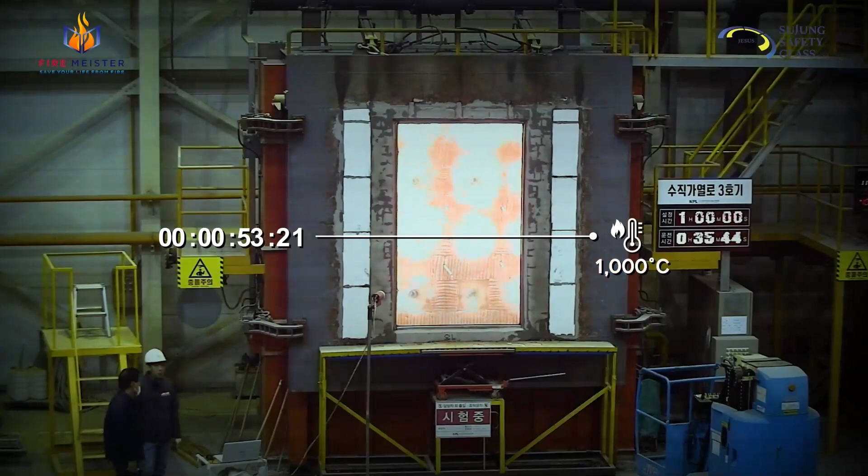The leader of fire-resistant glass that protects our lives from the flames and thick smoke of 1,000 degrees. A company specializing in fire-resistant glass: Sujung Safety Glass Company Limited.

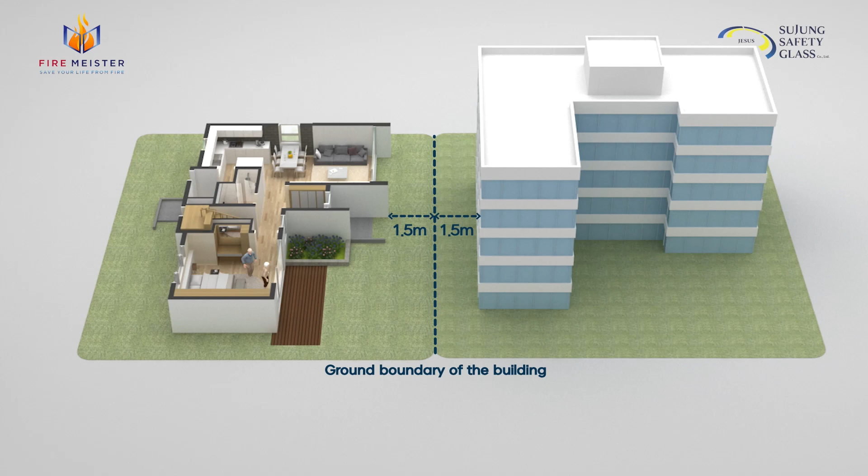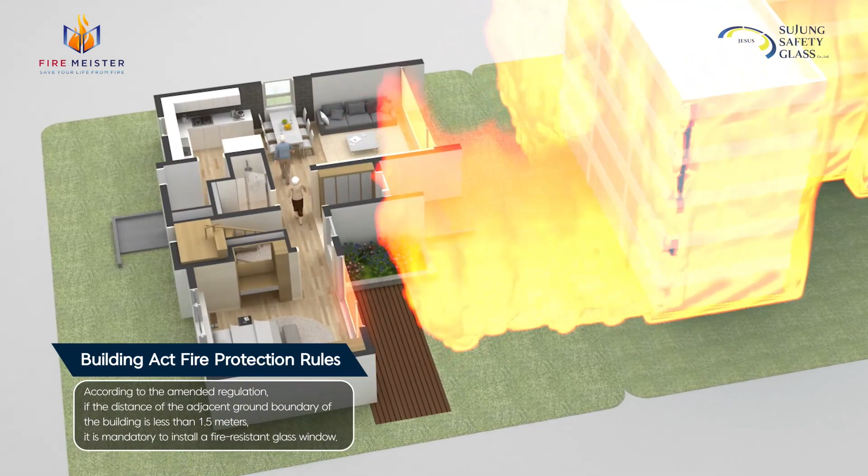In July 2021, the Ministry of Land, Infrastructure and Transport revised the Building Act fire protection rules to mandate the installation of fire-resistant glass windows in some buildings. According to the amended regulation, if the distance of the adjacent ground boundary of the building is less than 1.5 meters, it is mandatory to install a fire-resistant window with a performance for fire integrity of at least 20 minutes.

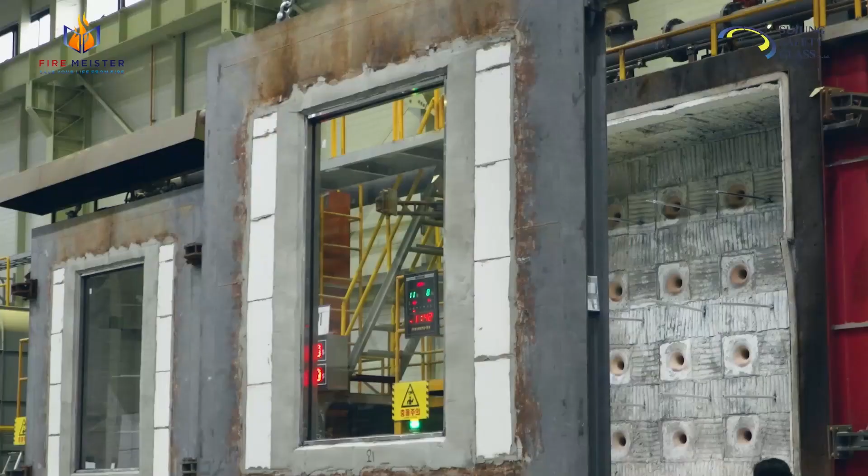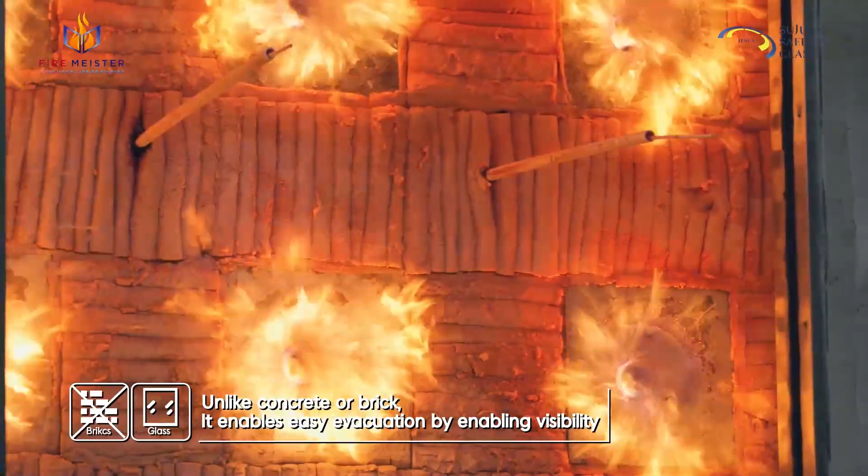In the event of a fire, Sujung Safety Glass's fire-resistant glass blocks fire and, unlike concrete or brick, enables easy evacuation by enabling visibility, as well as withstanding flames for the required evacuation time.

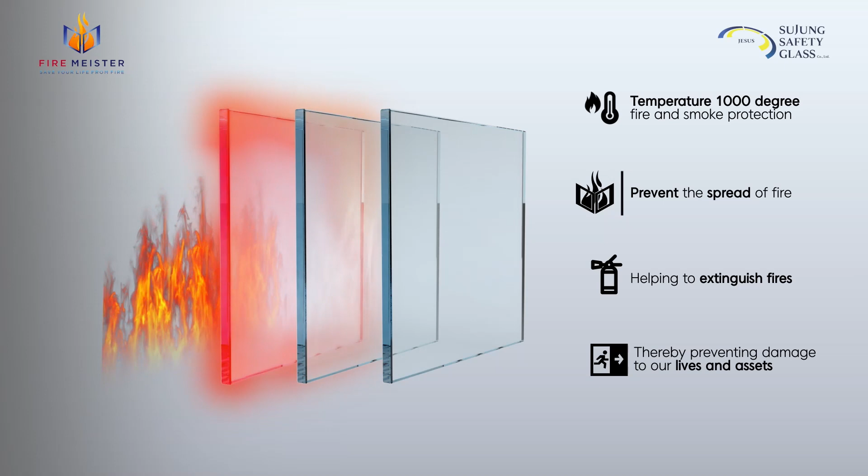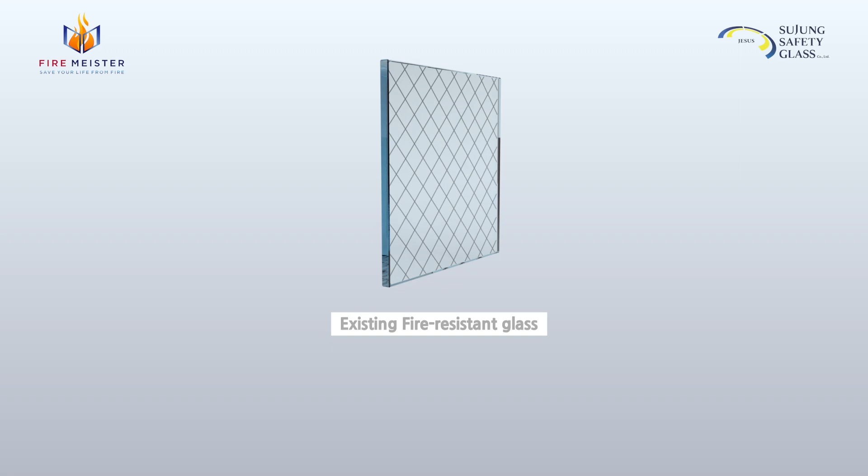Our fire-resistant glass blocks fires and smoke of about 1,000 degrees for a certain period of time to prevent the fire from spreading to adjacent areas, thereby preventing damage to human life and helping to extinguish fires to protect our lives and assets. 6T, 8T, 10T fire-resistant glass is a transparent fireproof glass composed of a single plate without a wire mesh inside the glass and shows fireproof performance for fire integrity of 60 minutes and 90 minutes.

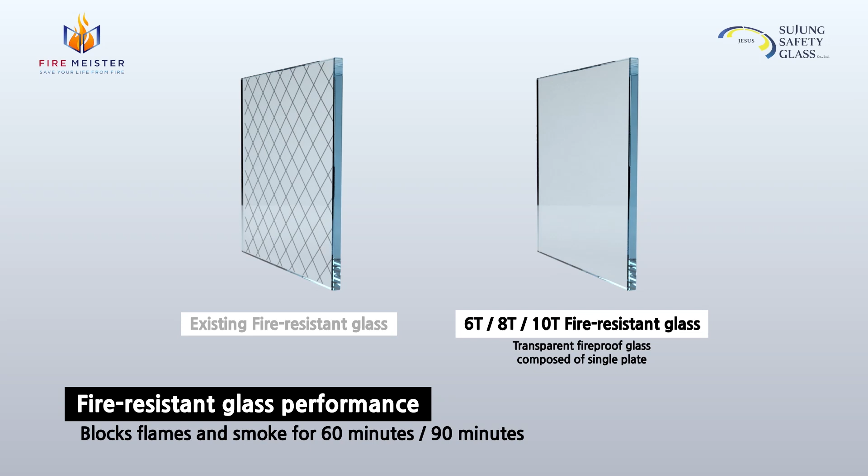By maintaining transparency for a long time in the case of fire, transparent vision can be secured, so it can effectively cope with evacuation of occupants and suppression of fire.

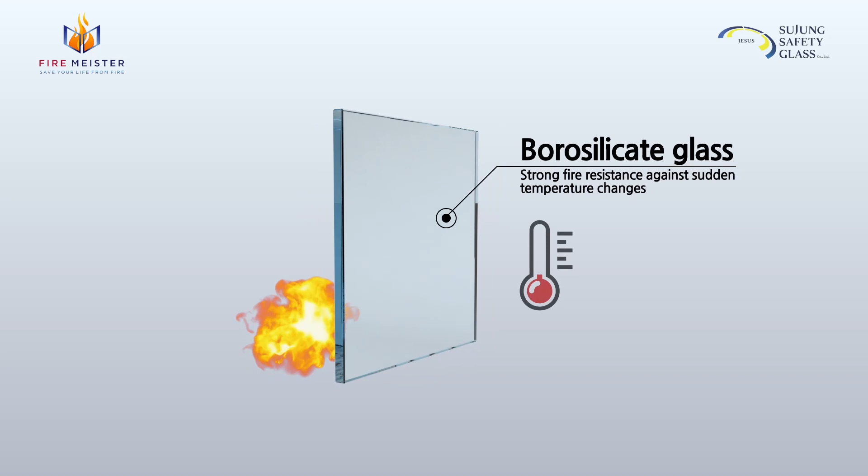8T fire-resistant glass is made of borosilicate glass, so it has excellent thermal shock performance and strong fire resistance, even against sudden temperature changes.

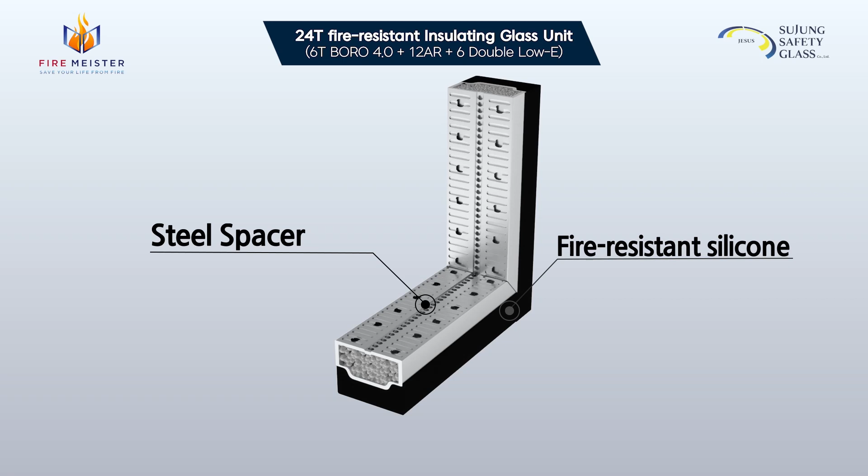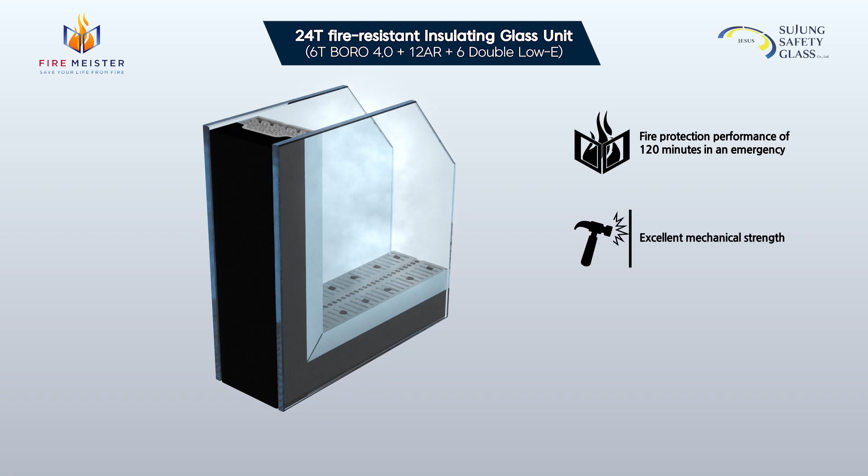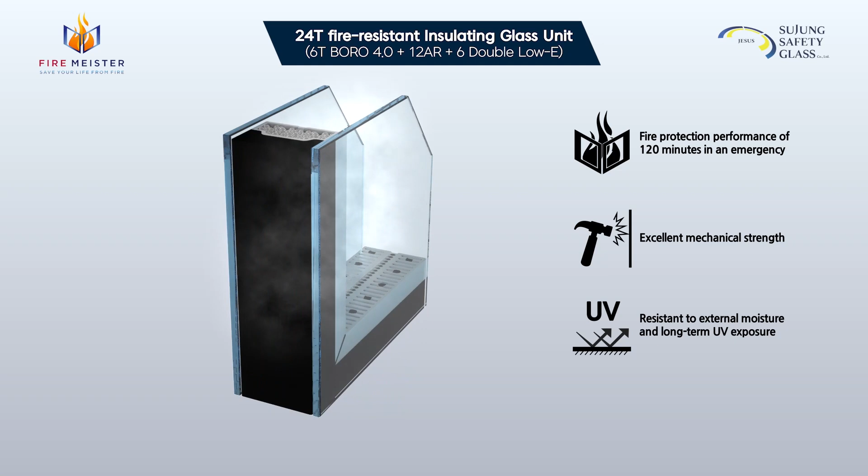24T fire-resistant insulating glass unit is a fireproof glass with an air layer between multiple glasses, which has an excellent thermal insulation function. Since fire-resistant glass is used instead of float glass, which is mainly used to make insulating glass units, it has excellent high performance with a thermal insulation effect in ordinary times and has a fire resistance performance of 120 minutes in emergencies.

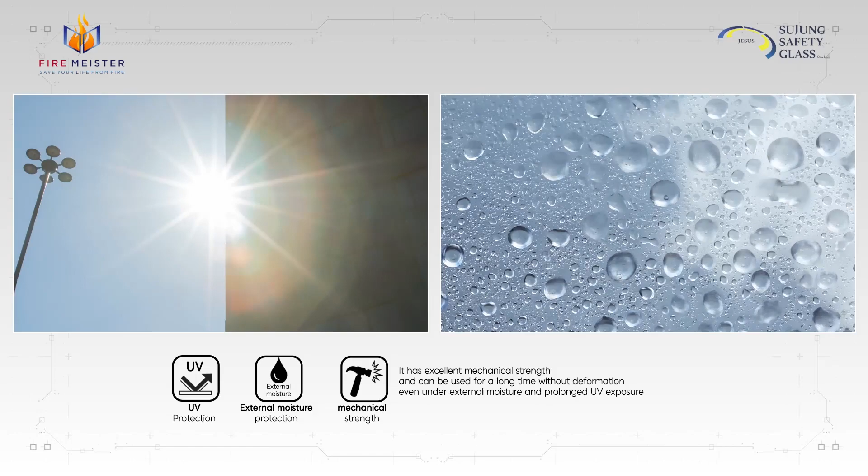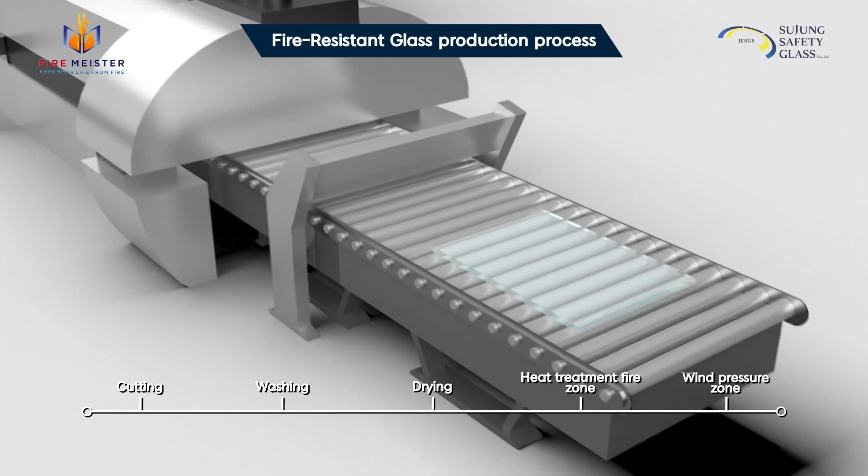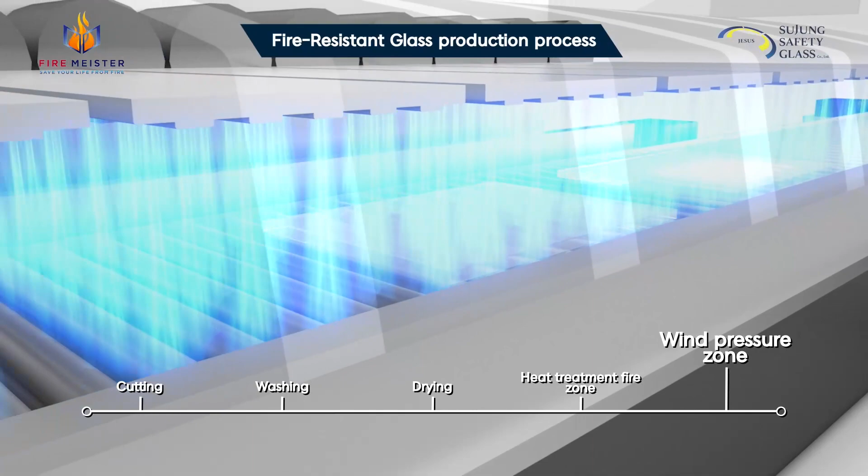It has excellent mechanical strength and can be used for a long time without deformation, even under external moisture and prolonged UV exposure. Unlike conventional fire-resistant glass, Sujung Safety Glass's fire-resistant glass is not manufactured using potassium ion substitution chemicals. Instead, it is manufactured using high-temperature heat and wind pressure of rapid cooling. It is not only eco-friendly, but can also be produced very quickly, which makes it efficient and effective.

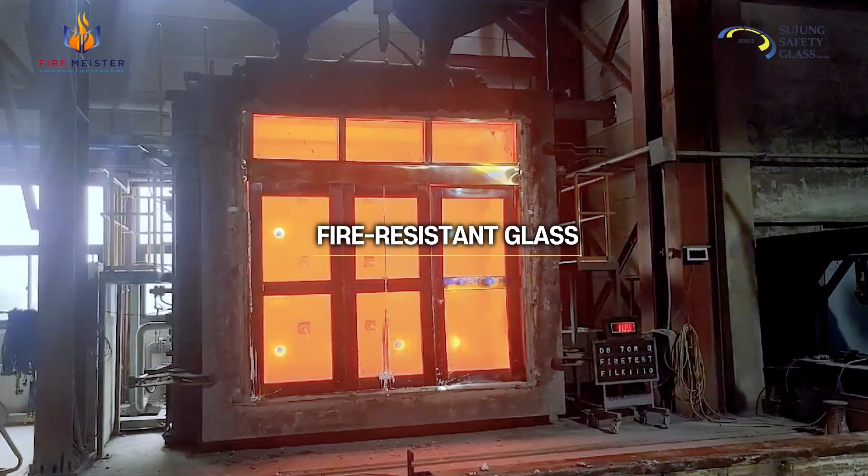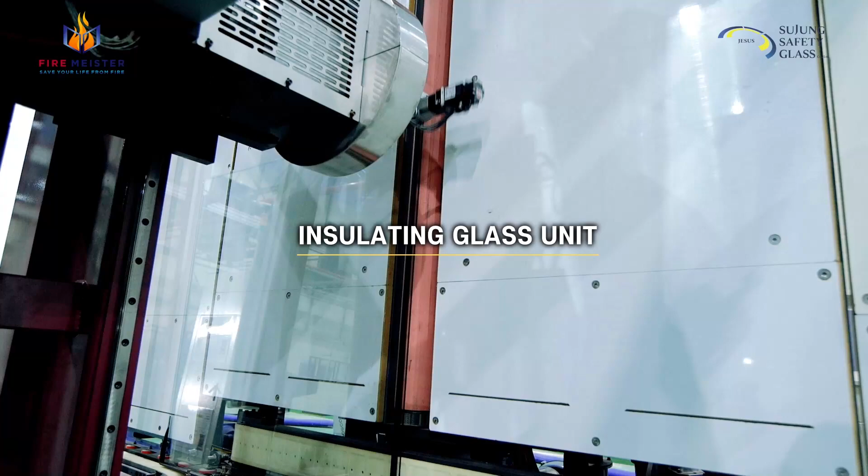The leader of high performance, high quality fire-resistant glass: tempered glass, laminated glass, and insulating glass unit that protects our lives and assets from disasters. A company specializing in processed glass: Sujung Safety Glass Company Limited.

Sujung Safety Glass Company Limited is a leader in manufacturing laminated glass that provides a beautiful and safe space. As a specialized safety glass manufacturing company, Sujung Safety provides a beautiful space with colorful glass and a safe space with impact-resistant glass.

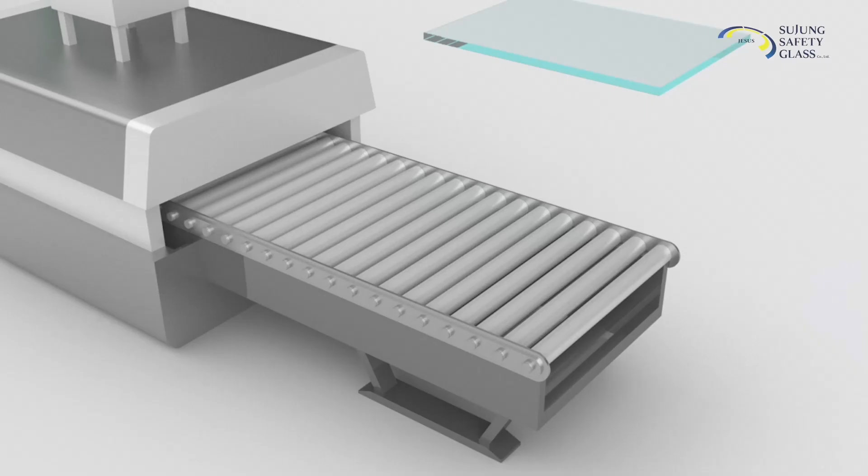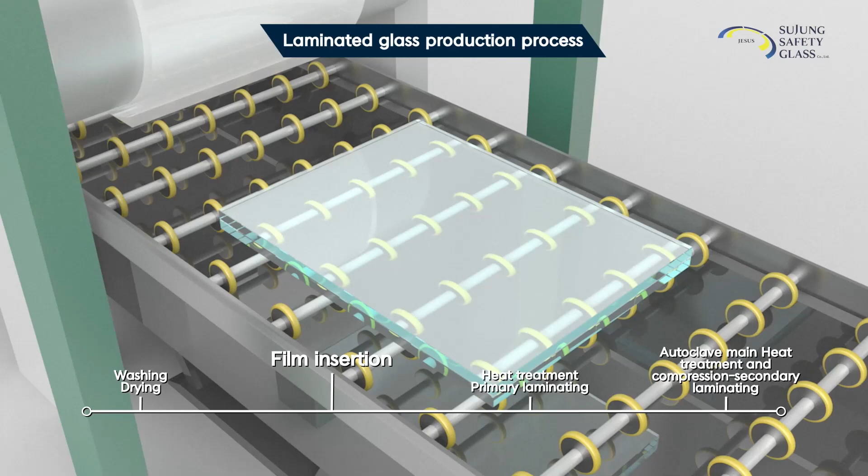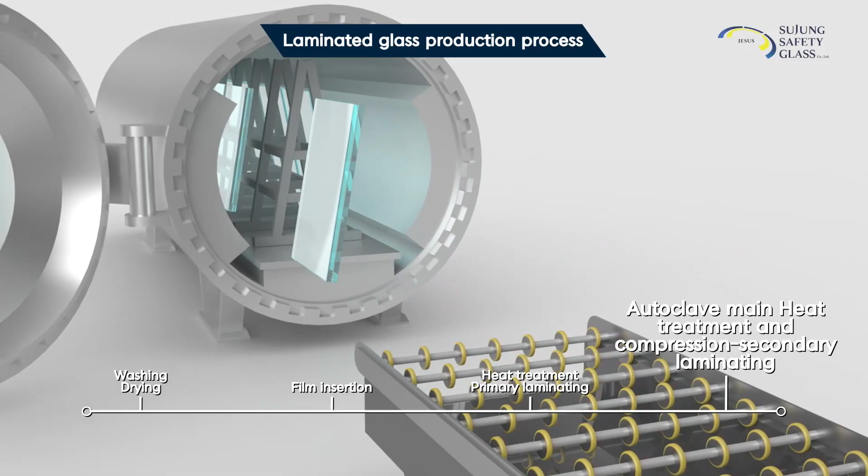Laminated glass is a glass that is perfectly adhered by inserting a polyvinyl butyral film between multiple glasses, completely removing the air between the glasses, and then raising the temperature and pressure to greater than or equal to 130 degrees.

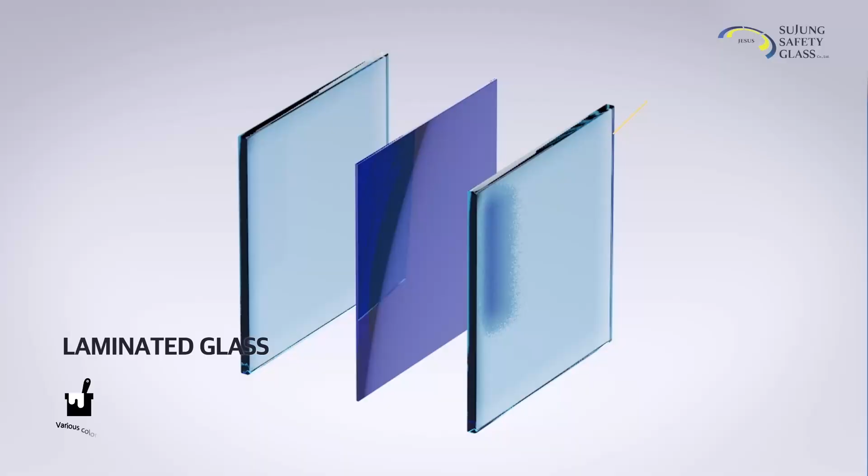As a glass used in various safety-required spaces, it is mainly used for transportation facilities, buildings, show windows, and so forth. The windshield of a car corresponds to laminated glass. For our comfortable space, laminated glass can be applied with various colors.

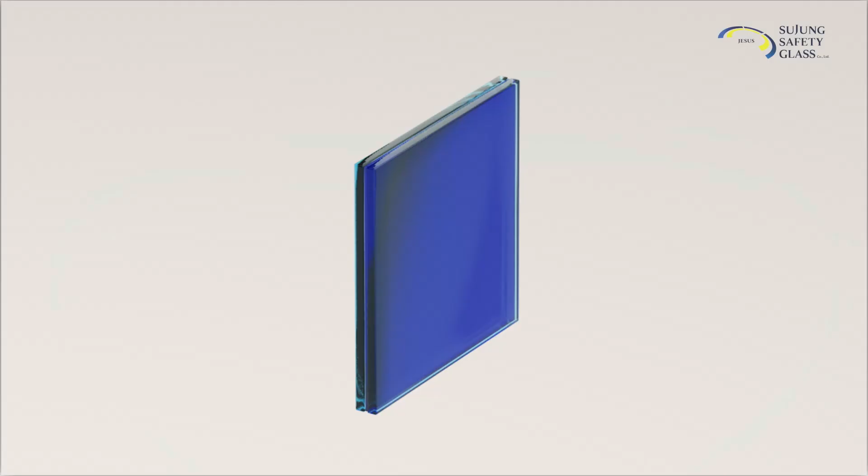Depending on the color of the film used, a variety of colors can be realized. It blocks 99% of the sun's ultraviolet rays, so it is resistant to deterioration and discoloration of objects.

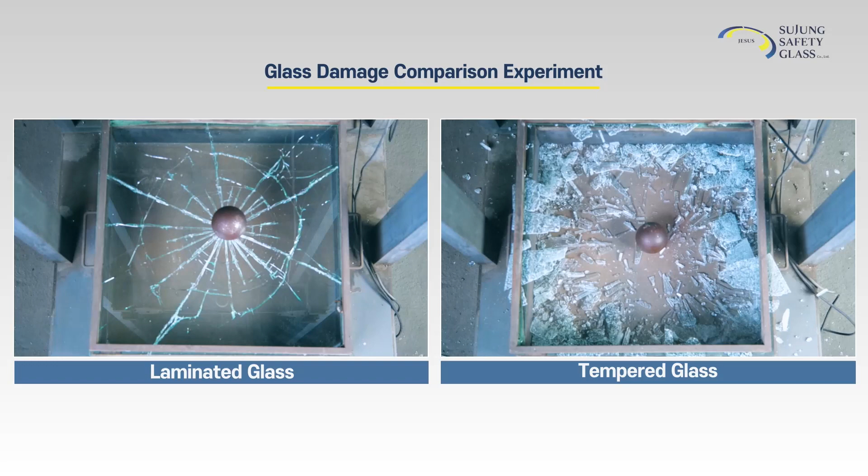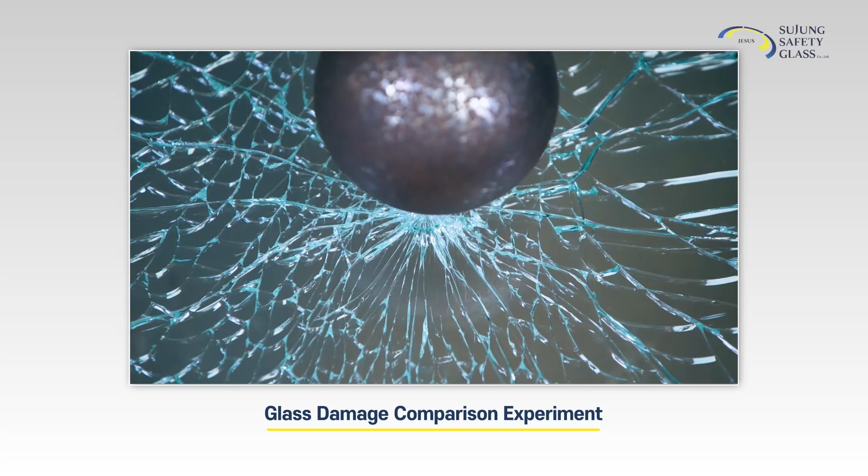As a representative safety glass, it has excellent shock absorption and a low breakage rate. Even if glass breaks, scattering of glass fragments is prevented, so it is very safe. Furthermore, holes do not appear due to breakage, so it can also prevent theft.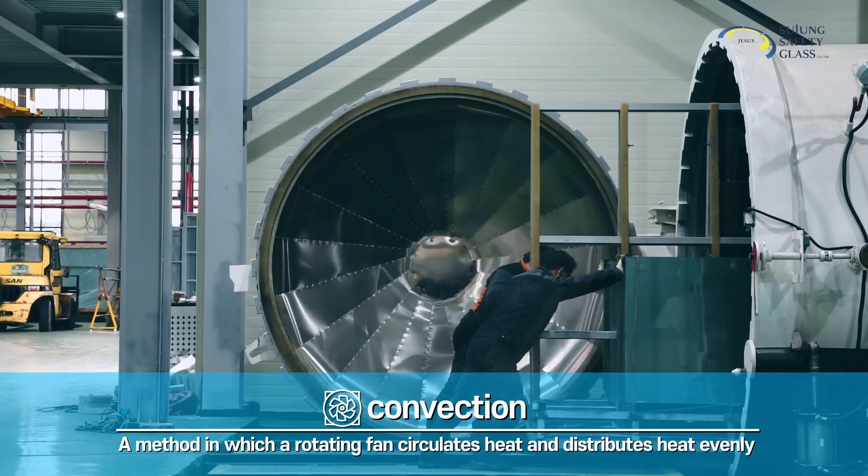With the technology and know-how of Sujung Safety Glass, it is finished with a bonding machine line composed of convection, and it is possible to realize clear and transparent glass without distortion of the projected image by evenly distributing heat conduction on the glass surface, without surface curvature or air bubbles that may frequently occur.

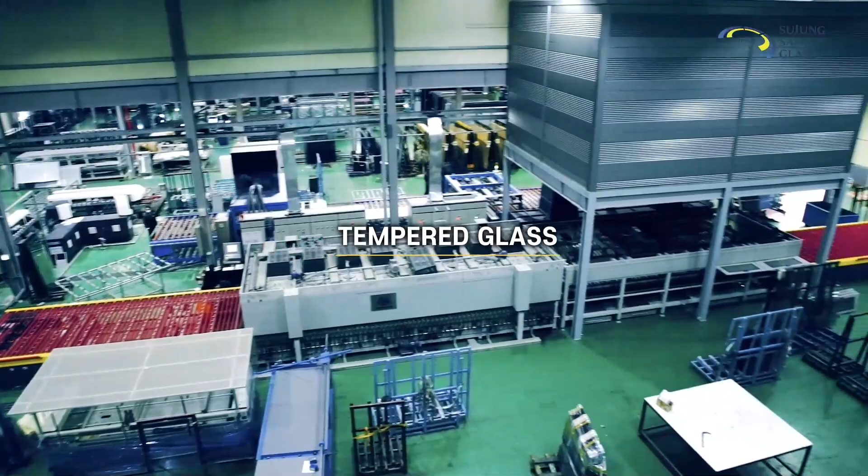The leading manufacturer of laminated glass, tempered glass, insulating glass unit, fire-resistant glass, and special glass. We emphasize comfort and provide a beautiful and safe space. A company specializing in safety glass, Sujung Safety Glass Company Limited.

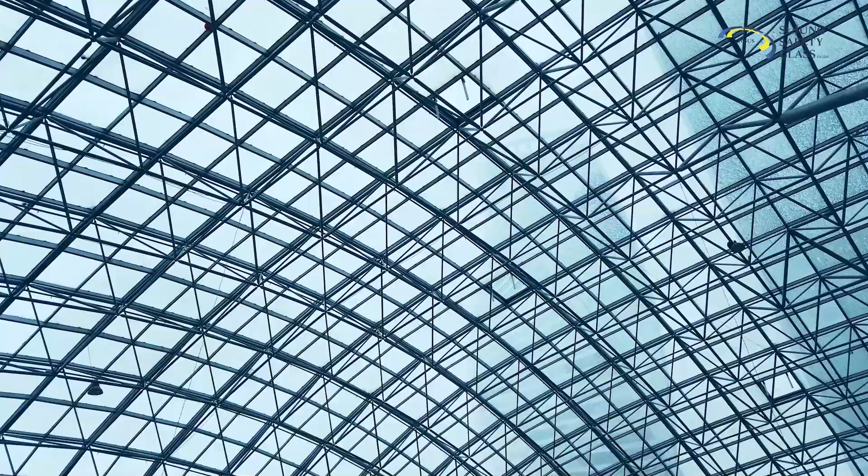Insulating glass unit is made up of 2 layers of glass, which creates a cool and warm space for a comfortable and pleasant life. A leader in insulating glass unit and a specialized company in processed glass.

Sujung Safety Glass Company Limited.

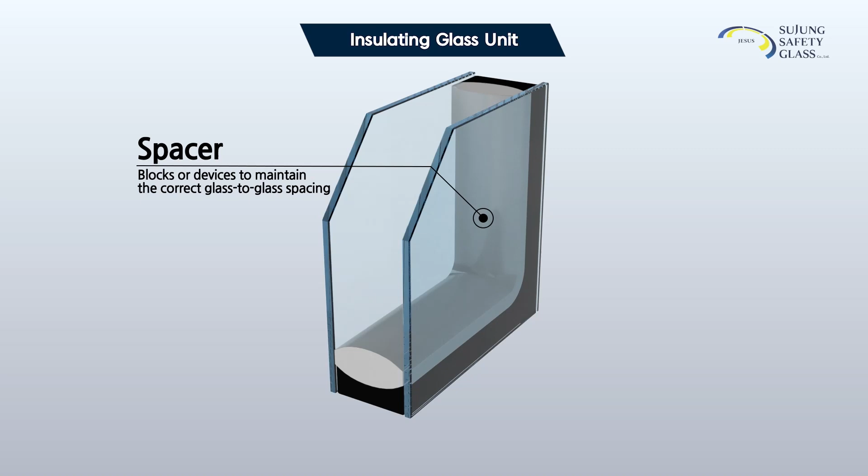Insulating glass unit is a glass in which 2 or more sheets of glass are kept at regular intervals with a dedicated spacer, and the periphery is sealed with metal or sealing adhesive. As a representative double-layered glass, it has excellent sealing power, so it is mainly used in railways, airports, exhibition halls, and buildings.

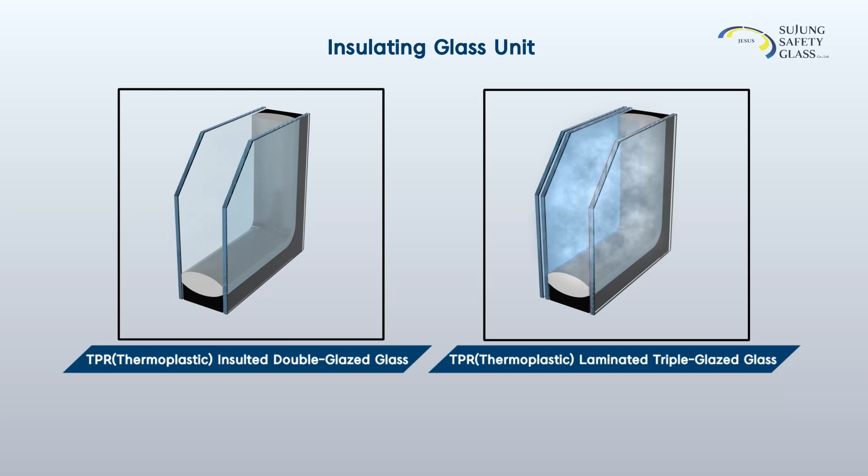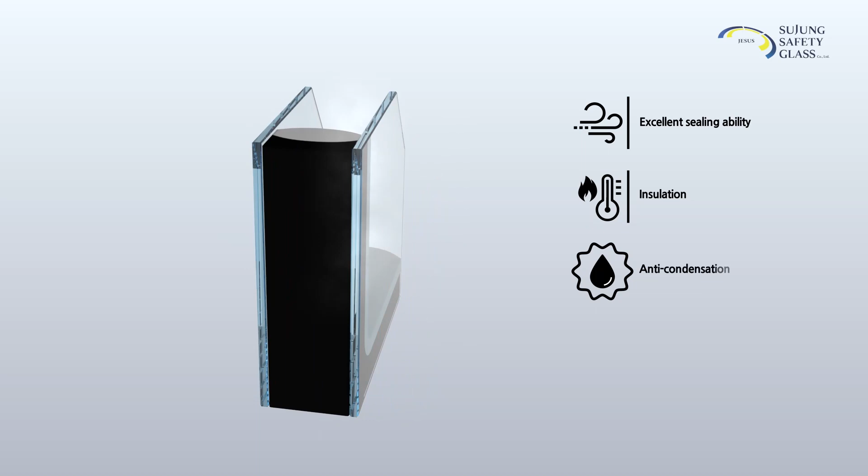The insulating glass unit of Sujung Safety Glass is largely divided into 2 types. TPR thermoplastic insulated double glazing glass is manufactured with at least 2 sheets of glass and a spacer with a layer of dry air. Its excellent sealing power reduces the amount of heat energy escaping through the window.

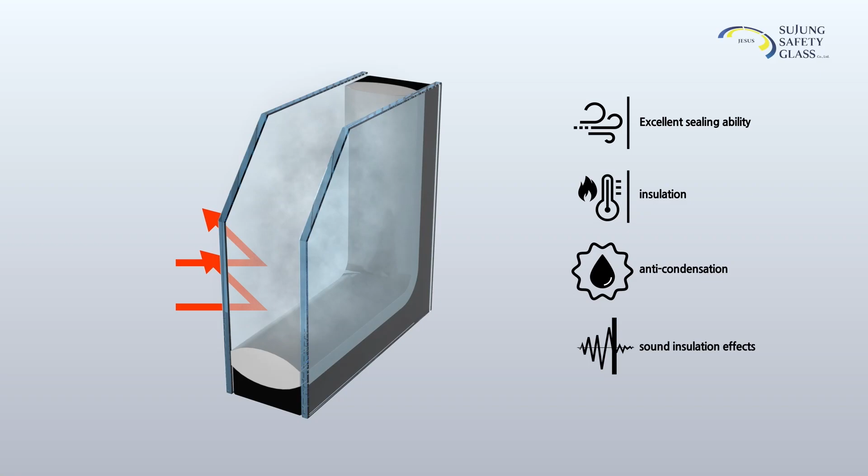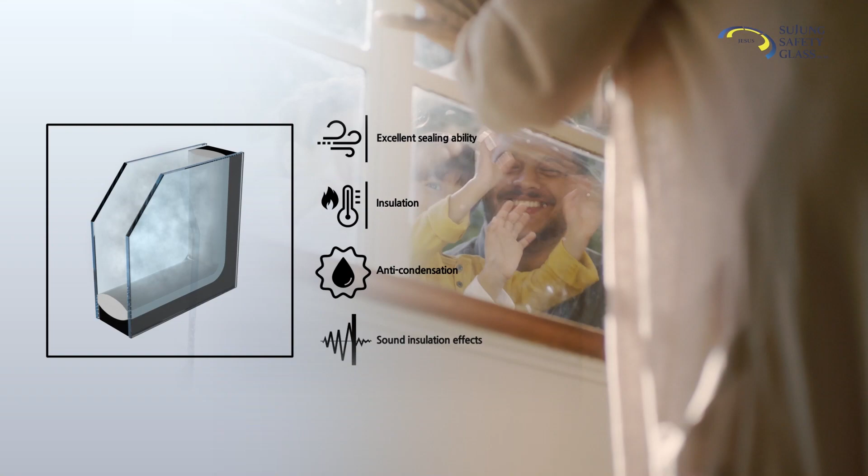Therefore, there is almost no condensation. It has insulation, anti-condensation, and sound insulation effects. Its insulating gas filled between the glasses provides much better insulation and anti-condensation than the general insulating glass unit, as well as provides a neat appearance.

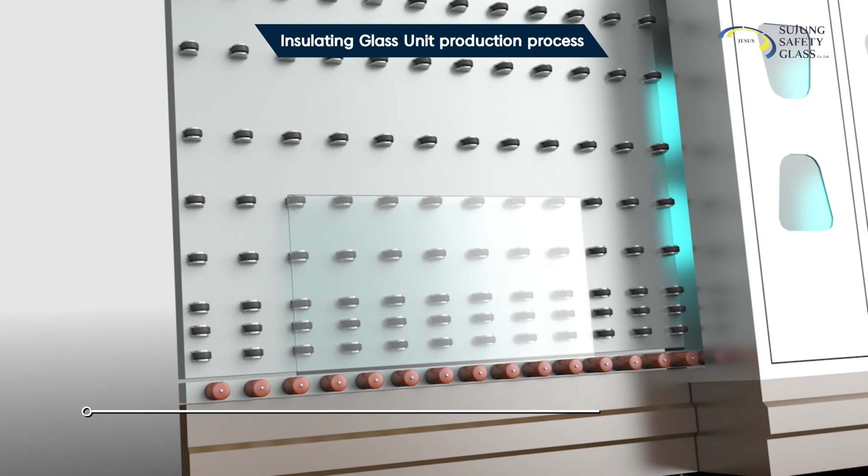TPR laminated triple insulating glass unit is a safety glass grafted with laminated glass on the insulating glass unit.

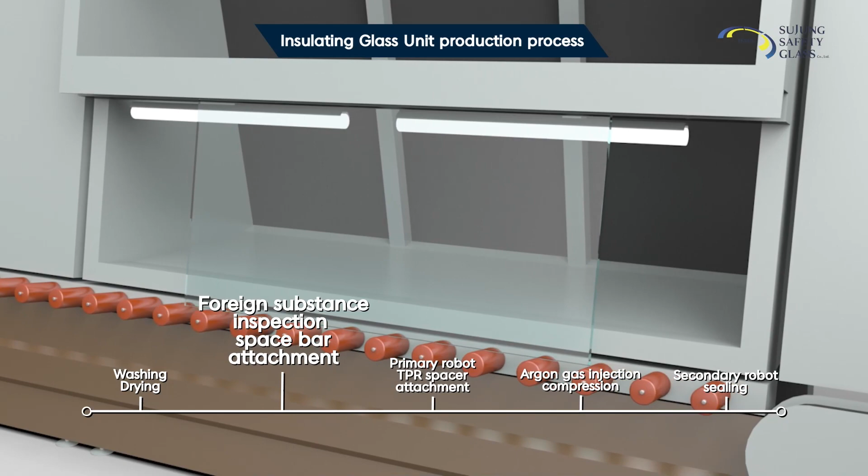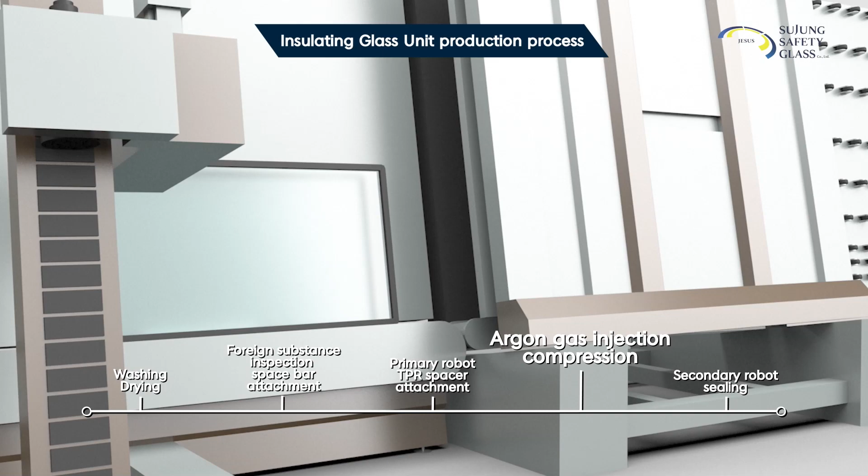This is the most representative glass for construction insulation that attaches and confines a thermoplastic spacer, sealing with silicone after injecting argon gas between 2 or more sheets of glass.

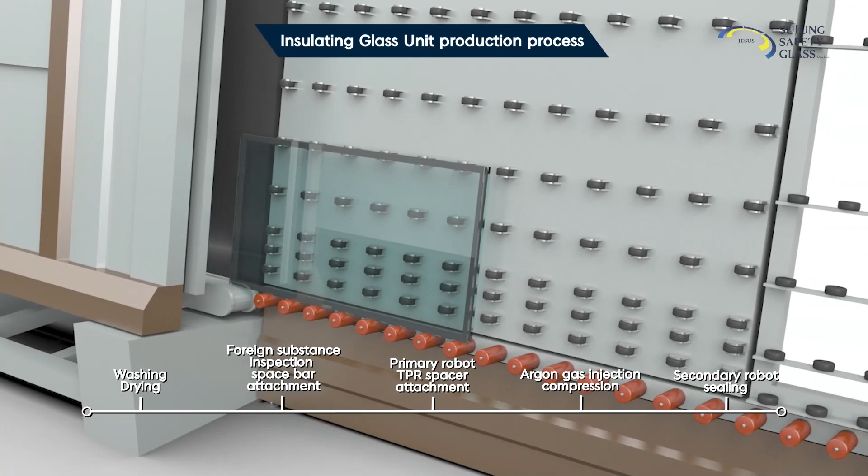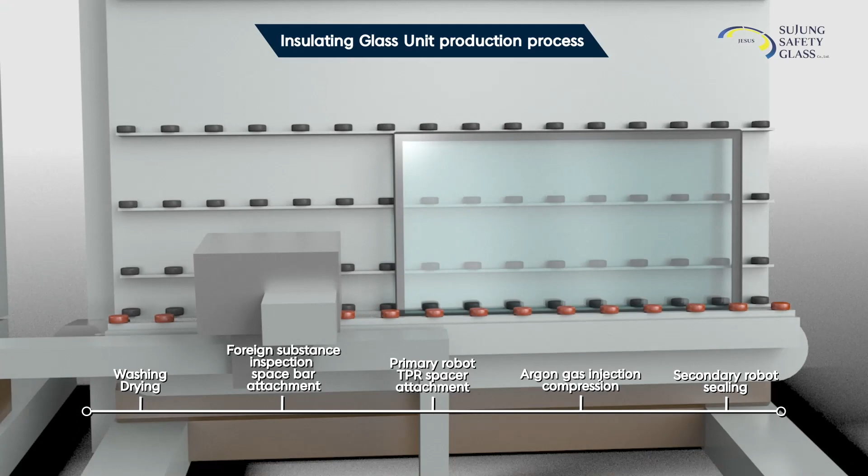By injecting gas and applying a heat insulating bar into soft low-E glass and laminated glass in the form of insulating glass unit, it enhances the performance of windows in terms of insulation and condensation prevention, thus demonstrating excellent insulation, sound insulation, and condensation prevention effects.

Applying laminated glass to the insulating glass unit can further enhance the UV protection effect. It blocks up to 95% of UV rays, and if laminated insulating glass unit is applied to the exterior window, there is no need for a handrail, so an excellent view can be secured.

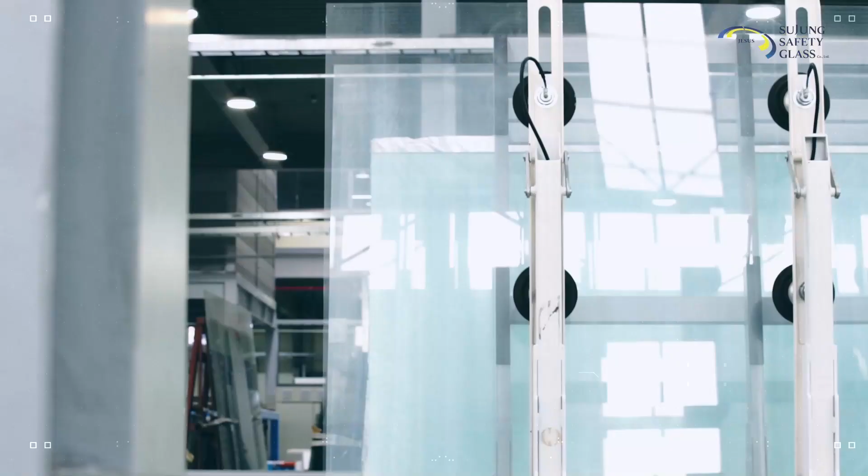A transparent, high-adhesive PVB film is inserted between the 2 sheets of glass to ensure perfect adhesion at a high temperature and high pressure.

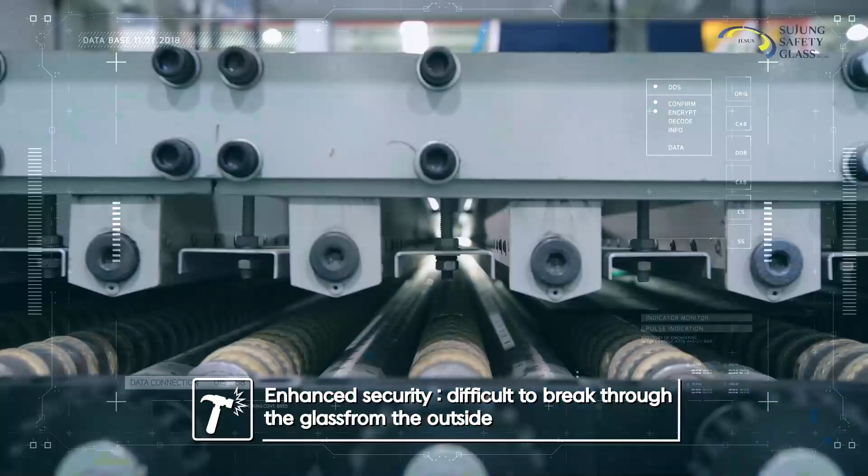Safety is ensured, as PVB film does not penetrate easily or scatter when damaged. It is difficult to break through the glass from the outside, so security is enhanced.

Above all, because PVB film is resistant to shock, the probability of glass damage from natural disasters, such as typhoons and earthquakes, is reduced due to excellent resistance to wind pressure.

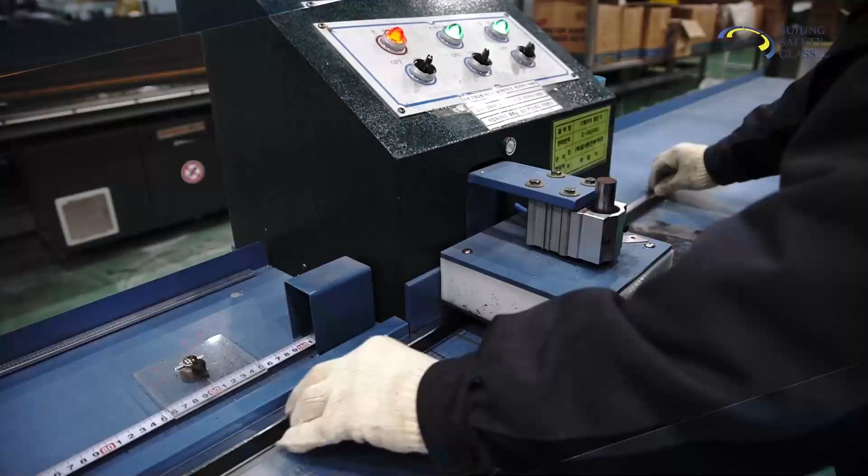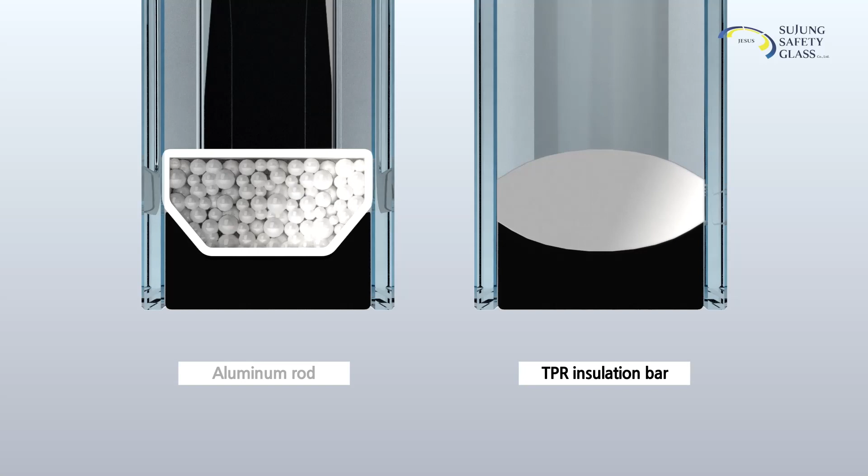The insulating glass unit of Sujung Safety Glass is applied with TPR insulation bar. TPR insulation bar is a high-quality material, and unlike conventional aluminum bar, there is no gas loss injected through the seam, and the thermal conductivity is minimized to complete glass with excellent insulation performance.

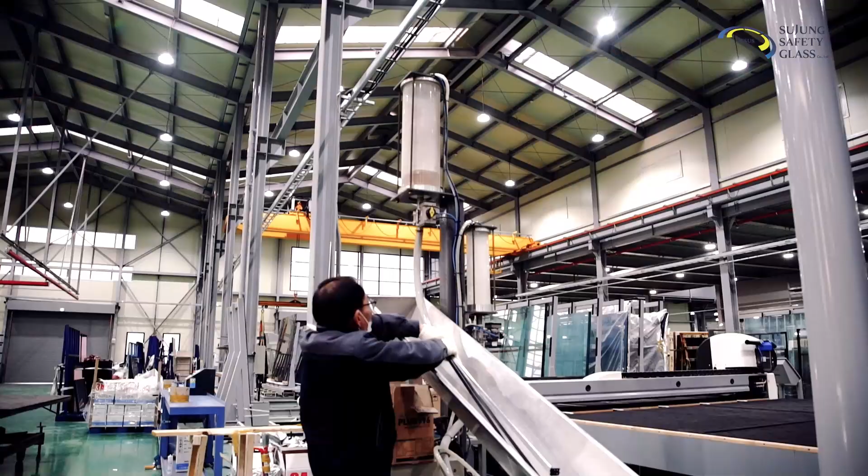The leader of insulating glass unit: tempered glass, laminated glass, fire-resistant glass, and special glass, making our space comfortable and providing a pleasant and beneficial life. A company specializing in processed glass, Sujung Safety Glass Company Limited.